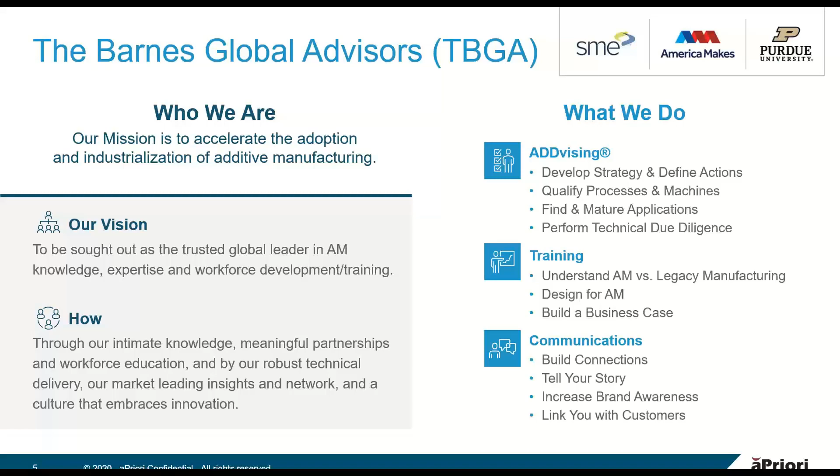Our mission is to accelerate the adoption and industrialization of additive manufacturing across the manufacturing supply chain. We do that by being agnostic, so we work with all the different additive technologies, which we'll describe in a bit, and we work across the supply chain, from powder producers to original equipment manufacturers of additive manufacturing and other machines, to engineering service providers, which we are as well, and to investors, inspection and post-processing, really across the size spectrum as well as the AM experience spectrum.

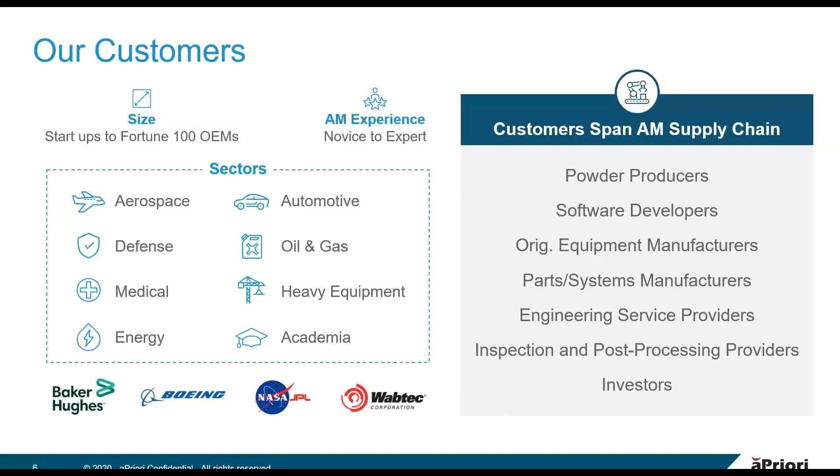Sometimes it's a 'hey, can I print this' question. Sometimes it's a 'hey, I've got this idea that my management won't support because I can't figure out how to get an additive business case to go.' And this happens across companies, from one-person size that just started in a garage to Fortune 100 OEMs, really across aerospace, defense, oil and gas, academia, medical, energy, and automotive industries.

So anyone on this call has probably had an article about additive dropped on their desk, or found something in the local business magazine, or seen something in the news about 3D printing, additive manufacturing technologies, right? There's been a lot of hype. Back in 2013 or so, when the light blue curve on this graph was generated, I would have told you that hype was way overblown, that additive manufacturing as an industry wouldn't have grown that fast.

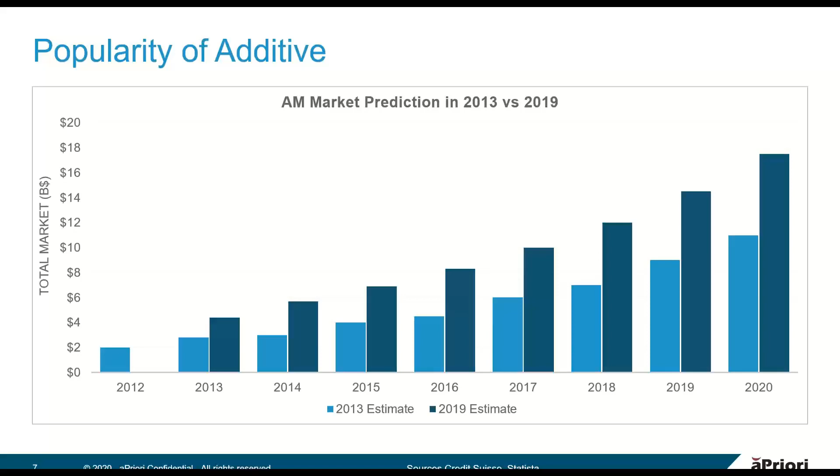But then look at the dark blue, right? That's an estimate 6 years later of the total additive manufacturing market, and it's significantly larger than the light blue prediction from 2013. Right now we're going through some unprecedented changes, so 2020 might not be as rosy growth, but we expect that growth in this industry will continue, after maybe a 2020 pause, maybe a 2021 pause. We're super excited, not because the industry is growing, but because the applications are so varied and so broad.

So what can AM do? It can make things from very small to quite large. Here we've just grabbed a few examples. The one on the very left is a miniature Eiffel Tower built by a polymerization process of polymers, and the total height of that exact scale replica of the Eiffel Tower is 1 millimeter. Can you imagine this large iconic structure being reduced to the size of 1 millimeter?

The second one there is a Red Dot Award winner from 2017, which is an innovation award in the additive space. Maria Sanchez designed and is modeling a dress printed on a typical 3D printer that you might find in your local library.

The third example there is a more industrial example: topology optimized internal structure of an aircraft service door. By using next generation computing technology and traditional casting, this is a part that can be much lighter and look very different than conventional parts. In this case, it's something like 30% lighter at equivalent strength of a conventionally manufactured door, and it takes much less time to manufacture.

And the quite large example there is a printer company called Icon and a community development company called Mobile Loaves and Fishes, which is using 3D printers to print concrete homes for the homeless in Austin, Texas, and in some communities in South America. So this is the breadth of what AM can do.

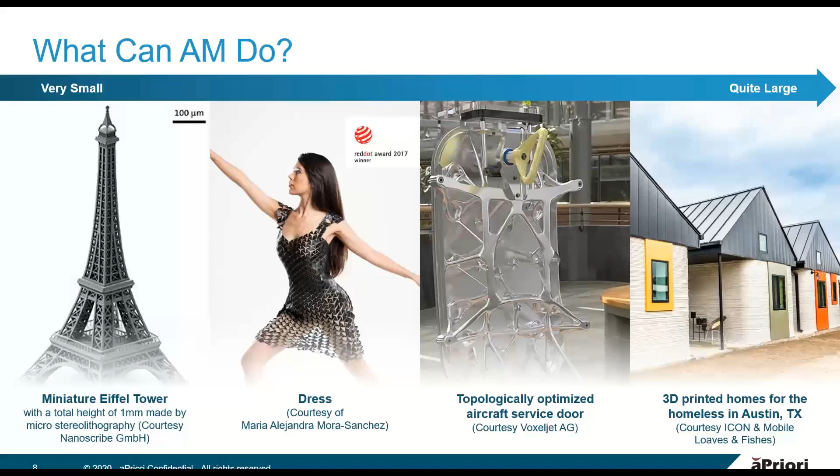And we love this breadth. And the reason why there's such a breadth is because additive manufacturing is really not just a technology, but it's a suite of tools that build parts layer by layer, usually starting from a platform. And here are the 7 recognized categories defined by ASTM committee F42. We'll go through them quickly from left to right.

So material extrusion, there on the far left, uses typically a filament or a pellet and is extruded through a hot nozzle, and makes parts layer by layer by moving in X and Y and then incrementing in Z. So it's typically a hot process because we have to make the polymer hot enough to become liquid, and it requires some energy. So those graphics - the red material graphic, the blue energy graphic, and then the density - are ways to think about these different technologies and describe their inputs and outputs.

So the second technology, binder jetting, is a powder bed technology that is interesting in that it basically takes a metal powder, spreads the metal powder, and then uses an inkjet head, much like the inkjet head you might have in a printer at home, to bind the powders together into an object. And then after printing, you do a couple other steps, including a sintering step, to get a solid metal object.

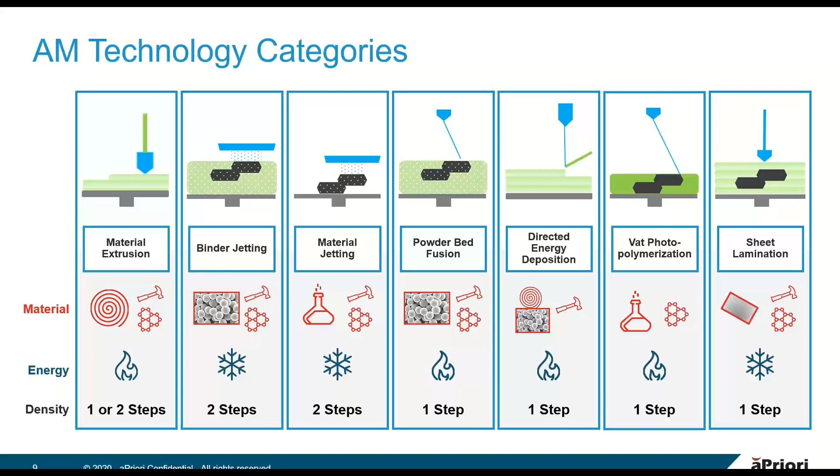And so this range of AM technologies is really what brings the ability to do such a wide range of interesting things in many different markets.

Okay, so TBGA here stands for the Barnes Global Advisors, our company. And we think about additive manufacturing applications through a maturity model. So the fancy thing that we saw, the aircraft service door, is not something you could go and design and produce as a company tomorrow if you don't have any experience. So we typically think about your experience - the skills and knowledge gained by using a manufacturing process - as the maturity model here on the blue side, and the product requirements - what's required to make a product - on the gray side.

So at low levels of maturity, like level 0, many companies have been using level 0 prototyping kind of technologies, made 3D printed objects for prototypes, for product development, and that's happened for many years. But the next step is production influence - using additive to either make short run tooling or shop aids.

Your workforce gets to learn about the differences and how you have to think differently to use additive manufacturing to solve problems. One example from a number of years ago: I bought a 3D printer for a manufacturing shop I was working in at the time.

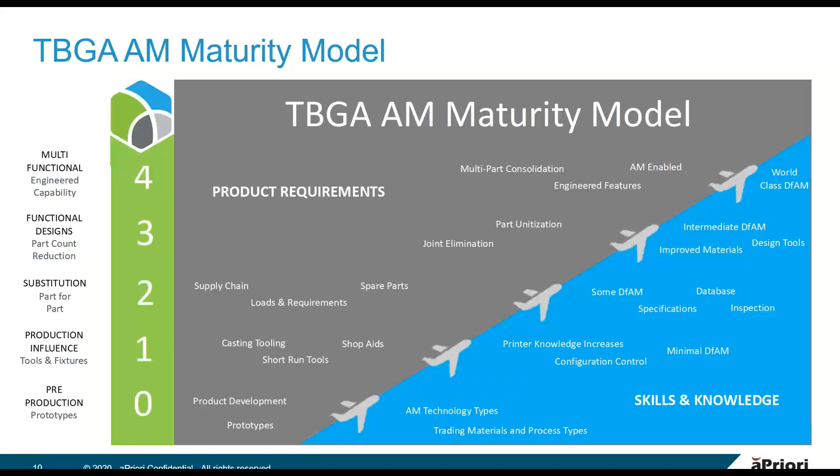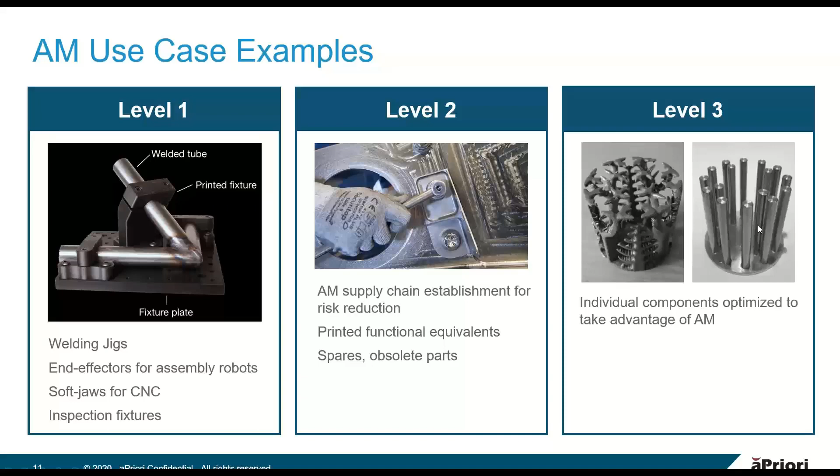So, simple example of level 3, but something that looks very different, and might be a hard sell at some point. So how do we encourage folks to identify candidates for additive manufacturing?

There's a bunch of different ways. I've chosen to highlight 4 here. Number 1 is complexity. If you have a very complicated multi-piece geometry that's hard to make, that requires multiple manufacturing steps in order to assemble, or has challenges in stress, reliability, or thermal performance because of the methods of assembly needed by conventional manufacturing, that's a good opportunity.

So think of something as simple as a heat exchanger that also needs to be a bracket. Instead of having a bracket and a heat exchanger, why can't that assembly do both?

The bright red there in durability is really thinking about where does a welded or a bolted joint fail in a product? Is there a way you can optimize your product and eliminate bolt joints, brazed joints, welded joints, or does the machine tool limit the geometry you're using? So durability is often a good thing, looking at part failures and assembly failures and why, and could you re-engineer that for better life using additive manufacturing, maybe putting 2 or 3 parts together as one.

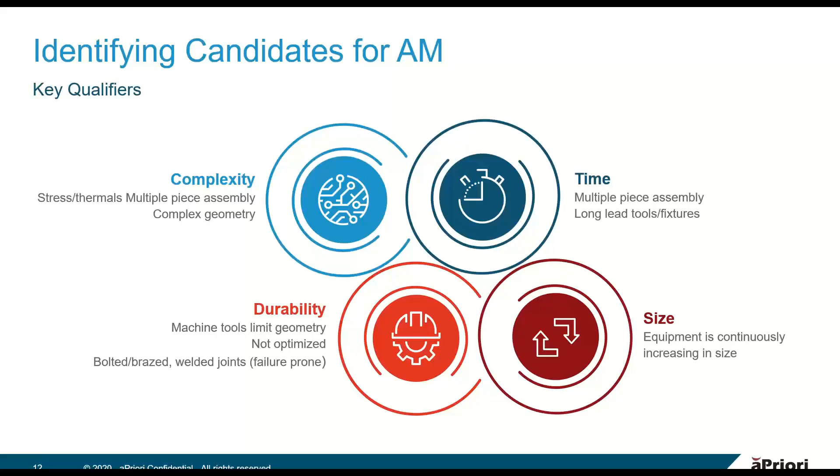If we look at the economics of additive manufacturing, with a trade study we did a number of years ago: think about the legacy method, illustrated in red, taking a block of material and carving it using subtractive manufacturing and machining into 3 brackets. We take relatively low cost material, although this is titanium so it's not that low cost. We spend a lot of time, effort, and money machining 25 pounds, or kilograms excuse me, of material away from the block in order to deliver a part to a customer at a cost of about $3,500.

If we look on the right side, illustrated in gray, instead building those 3 brackets up from a base plate, we end up using considerably more expensive material. In this case it's still titanium, but titanium powder is expensive. Printing at a relatively common rate, doing some machining - instead of lots of volume machining, we only do surface machining to get to the same net shape - for a total part cost of about $1,500, which seems a lot more attractive to me. Total cost savings on those 3 brackets is almost $2,000, which is nothing to sneeze at for titanium.

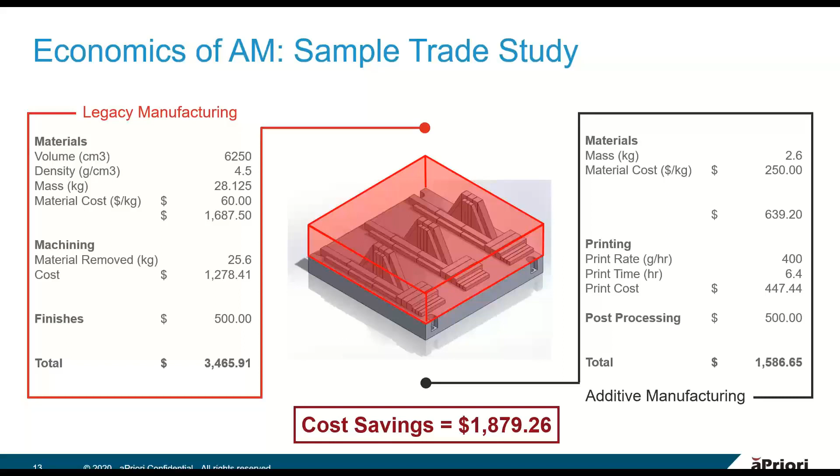If we look at overall additive manufacturing markets, aerospace sort of led the way, and medical. Aerospace has been flying military jets with additive printed parts for more than 20 years. Commercial jets have been flying plastic 3D printed parts for a number of years, and really getting great innovation in printed metal parts because of the demands of lightweight, strong, durable, but high complexity that aerospace brings to each individual part.

On the medical side, knee and hip implants led the way, followed by spinal implants, and dental reconstruction has been used for a number of years. On the knee and hip side, the first commercially implanted knee and hip implants both surpassed 10 years in their respective patients last year.

Luxury goods has been an interesting adventure in that being able to customize a ring or a necklace using additive is quite effective. Lots of luxury goods, you may not even know you've bought something that was 3D printed, because the luxury good company wouldn't let you know that. But it may have been instead of a more traditional cast process, which is how most jewelry is made.

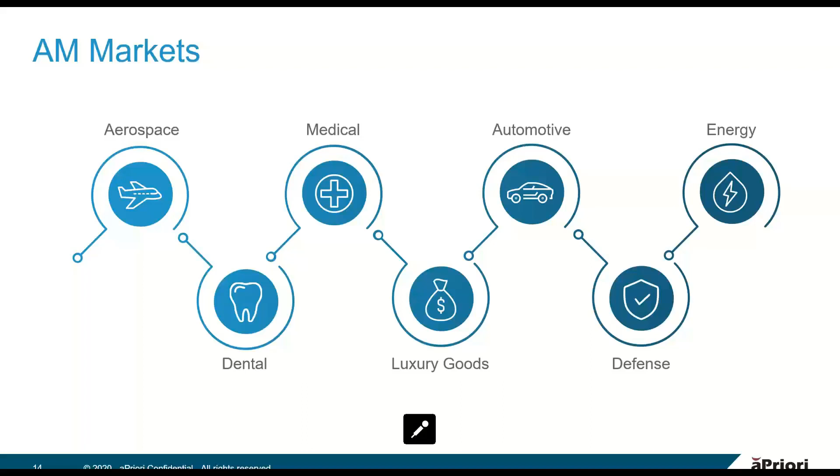Great, thanks, Kirk. Now, I'm really excited to talk to everybody today about the case study that Kirk and I had worked on. But first off, let me introduce you a little bit to what we do at aPriori.

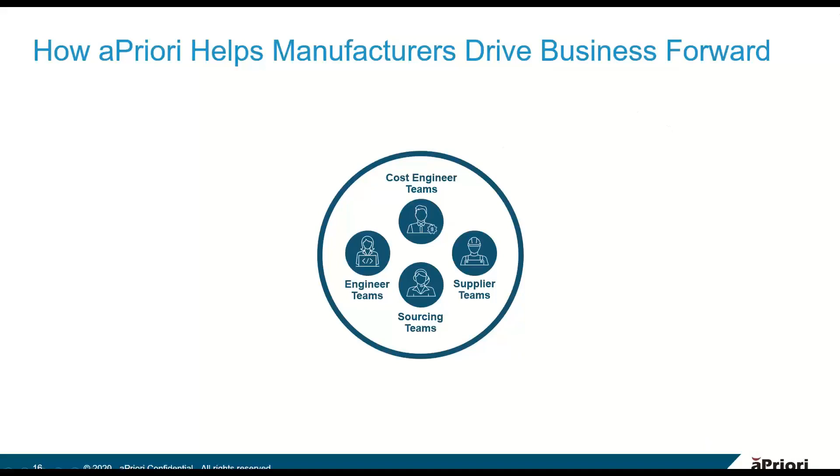At aPriori, we help a number of roles throughout the manufacturing organization, and we do that in a number of different ways. First off, it's to help make decisions faster by estimating cycle times and costs based off of your digital twins and CAD files within our factory models.

We also help you to work faster by automating the feedback of manufacturing insights and providing that to engineers, as well as automating some processes within sourcing.

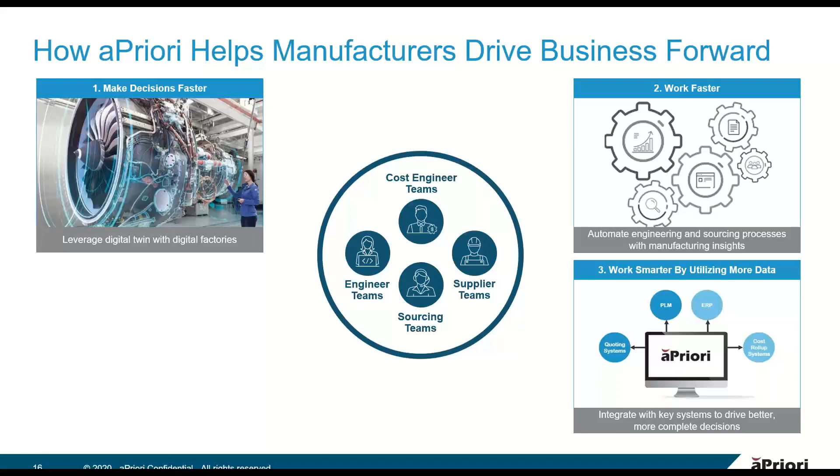We also help you to work smarter by using the data that you already have within your systems to drive our models, as well as putting our own outputs where you need them, maybe in your PLM system, ERP, or other systems. And with our new cloud capability, we allow this to happen anywhere, which is even more critical now to help support collaboration across your organization.

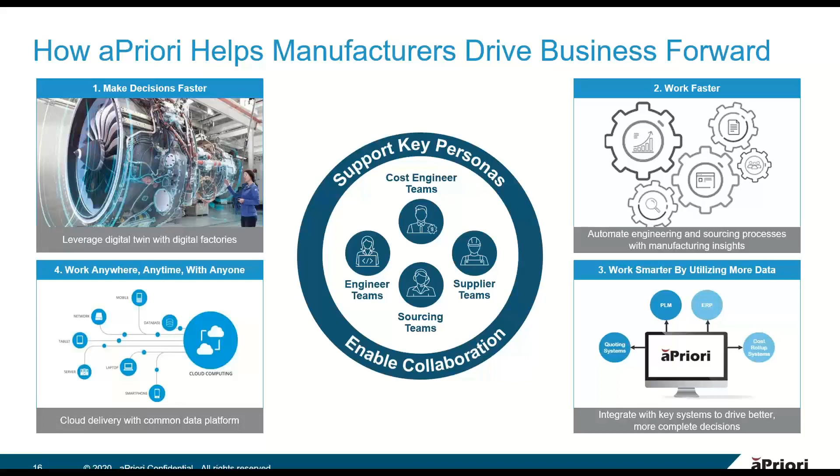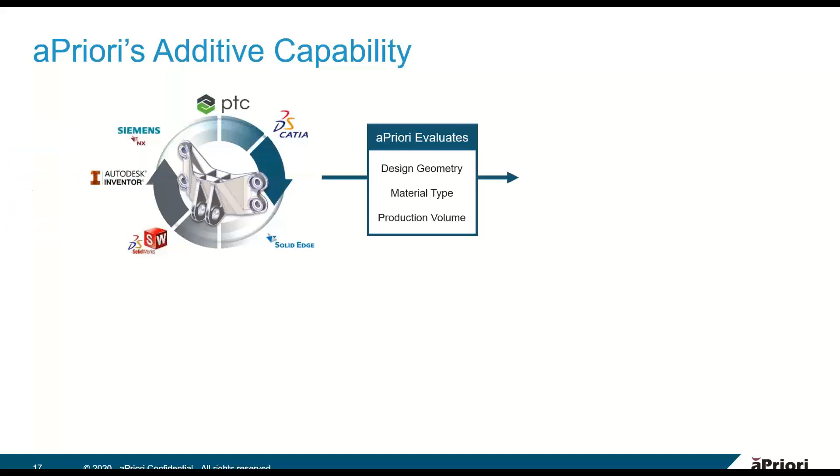So let's take a closer look at how we actually support these efforts within our product. With our software, we can read most major 3D CAD systems and analyze them. As we do the analysis, we evaluate the design geometry, the material type, and the production volume in order to estimate a cycle time and cost.

Within the space of additive manufacturing, we support a number of different processes that Kirk had mentioned earlier: SLA, polymer and metal powder bed fusion, and material jetting.

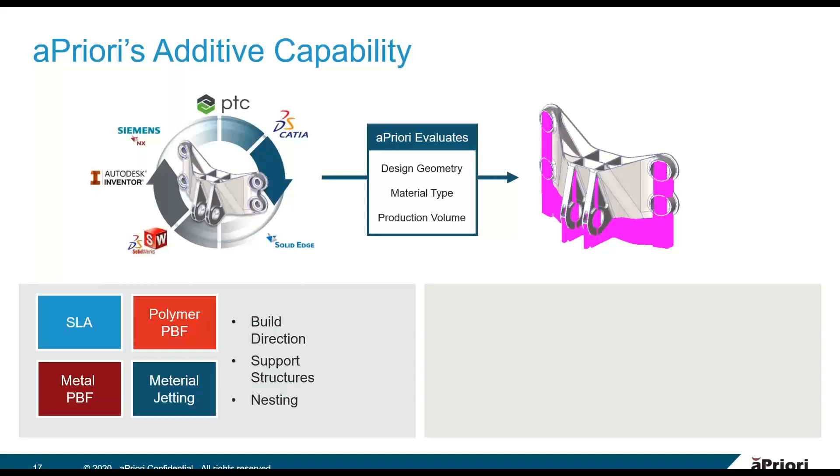As we do these types of evaluations, we can see an example in the upper right-hand corner of additive manufacturing. We determine a build direction, we determine what support structures may be needed based off of the type of process that's selected, and we also nest the part onto the build plate.

By doing so, we end up capturing that printing time, but we also figure out what secondary operations are required based off of the printing process that we're using and the requirements of the part. This can include things like break off of those support structures, secondary machining of surfaces, cleaning to remove dust and other materials that accumulate during the printing process, as well as secondary heat treatment and sintering.

Again, this is driven off of the support structures that we're calculating, as well as the tolerance information that we're pulling from the part itself.

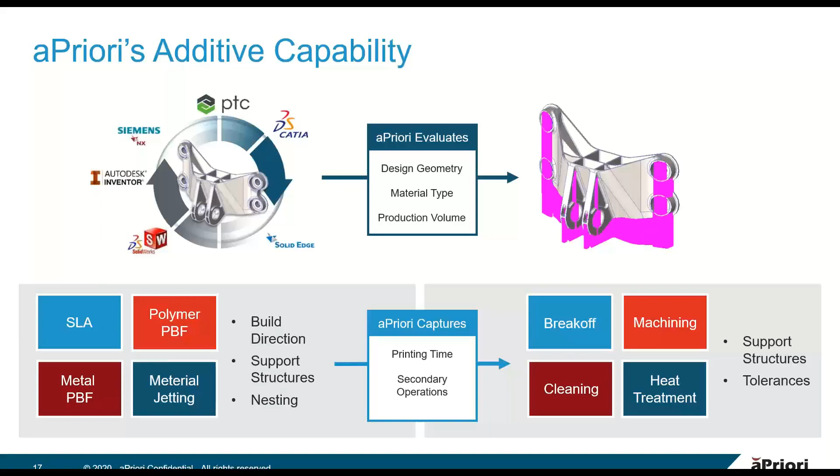Before we move on and start taking a closer look at the case study, it's time for our second poll, where we're going to focus on understanding how you're evaluating if additive manufacturing is currently appropriate for your parts. It looks like we see a lot of people who are using quotes in consultation with suppliers, some with internal expertise, and some use of previous data, and then we have a reasonable number who are also doing no evaluations currently. So hopefully by what we show with our case study, you can gain some understanding about how, with aPriori, we can support making these types of assessments and trade-offs.

Here we have our case study, which is a part from the aviation industry, which is a valve actuator housing. And this is a part that Kirk and his team use within some of their training. So Kirk, would you like to tell us a little bit about it?

Sure. So this is a part that I was asked to do a level 2 part-for-part replacement on when working with a large company in the aircraft engines business. Traditionally, this part is made with die casting and is made with a high permeability material that's like 50% iron and 50% nickel. As a quick case study a number of years ago, we saw that we could redesign it just a little bit and use laser powder bed fusion to print the part out of stainless steel, which had the magnetic properties required. And that took us about a week or two in order to do the evaluation and say, yes, we could print this part and we could do a low volume run of maybe 100 parts of it.

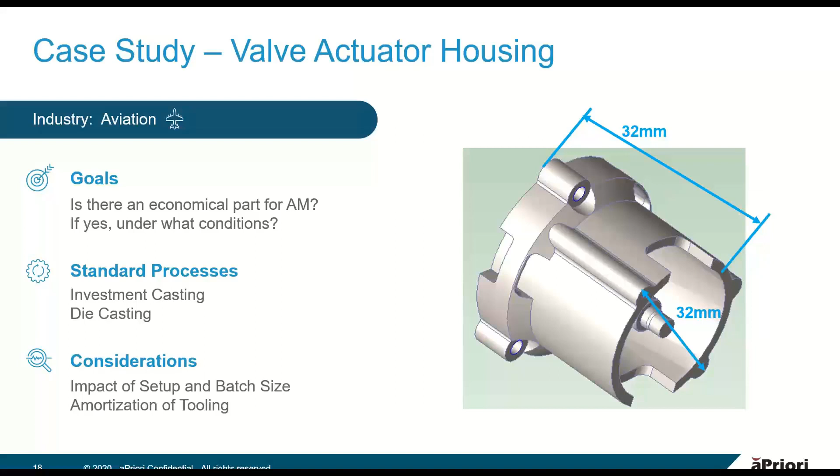Within aPriori, we make investigations really easy. So when I ran through this investigation myself, my first step was to load the CAD file into our system. And then I was able to very quickly create the 3 different options, one for investment casting, one for die casting, and then one for additive manufacturing, where I used metal powder bed fusion.

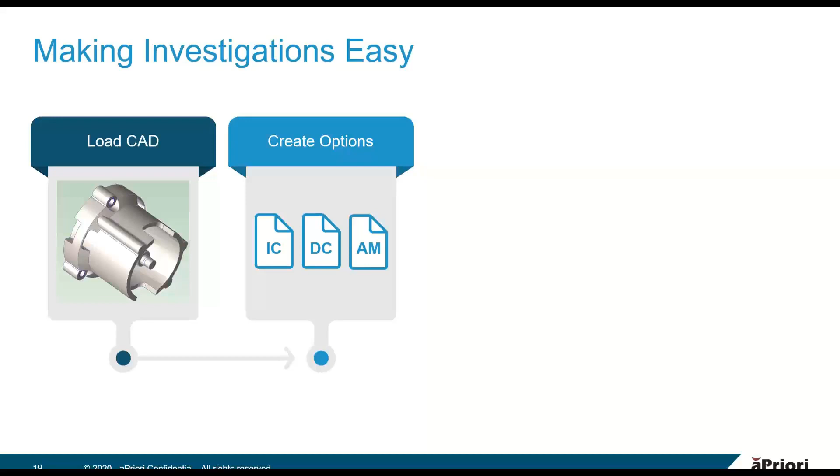Based off of those first 3 options, I could use one of our newer features called matrix costing to very quickly create a selection of different scenarios with various annual volumes and various batch sizes to start to understand where breakpoints might be. After I completed those, I was able to generate the reports.

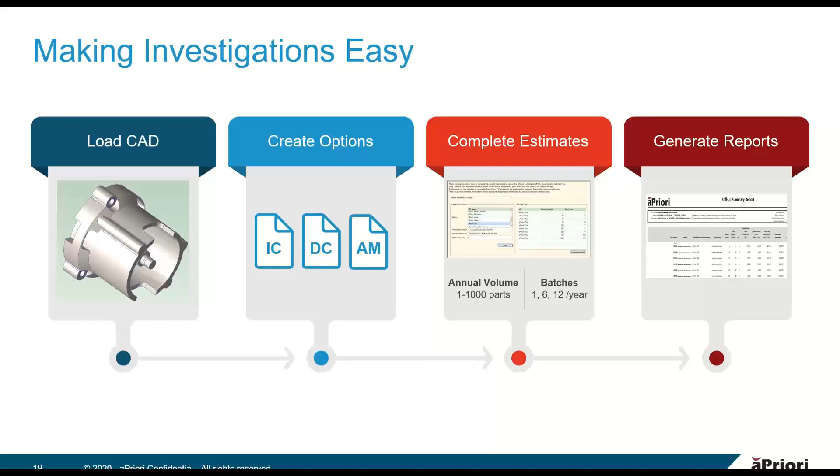Now, as Kirk mentioned earlier, and I'm sure since many of you work with your suppliers to do these evaluations currently, you know that this can take days or weeks in order to get even these first options back. But doing a large selection of different values based off of annual volumes and batch sizes can take even more time. I was able to do this analysis in less than 2 hours in order to get all of this information out. We can see definitely a time advantage there.

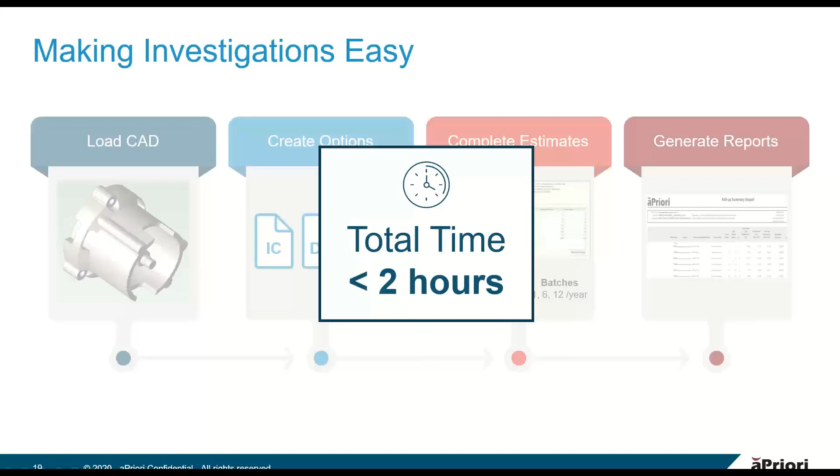Now let's take a closer look at how the costs break down and what we're able to see within the context of aPriori. First off, what we want to focus on is what's known as fully burdened cost. And fully burdened cost includes not only the more traditional things we think of when it comes to a part cost, such as the material cost and processing cost related to labor and the machine time, but we also include the capital costs.

So these are the one-time costs related to maybe the hard tooling that we see for investment casting, so around $10,000, die casting around $20,000, and then with additive manufacturing, we have one-time costs related to programming and fixturing that come in at about $600. Now we take and split that over the total number of parts that we're making in our run. So in this case, it's 1,000 parts over 5 years, so 5,000 parts. And that gives us an amortized value that we assess to each individual part.

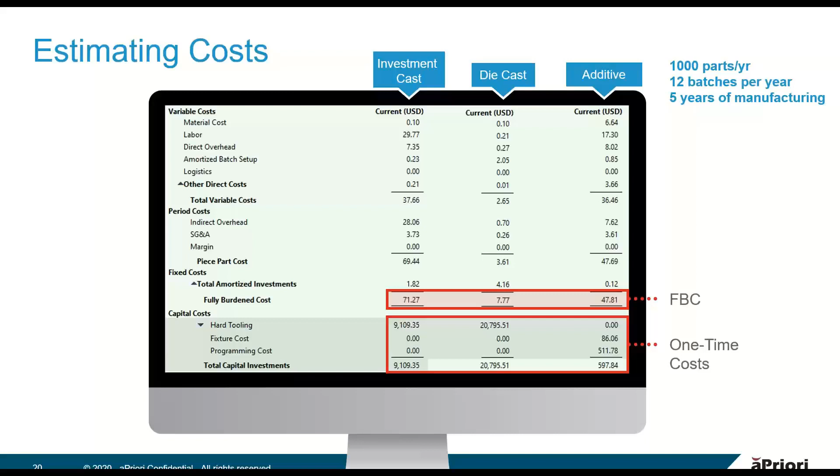In addition, another thing that's driven based off of how we select our batch size is an amortized batch setup. So when we select a batch size, we split the amount of time it takes to set the machine up and the cost related to that across the parts in the batch. And so we can see that here. What we notice is that die casting in this type of scenario ends up being the least cost, because though the investments are low for both investment casting and additive, as well as the batch setup, some of the other costs are much higher, such as the actual cycle time, which will drive the labor and overhead costs much higher for the other processes.

But it's important to understand this is just a snapshot. This gives us one example, in this case of 1,000 parts with 12 batches per year. But what we want to understand is where those breakpoints are, so we can make the best assessment possible and the best choice for our individual part.

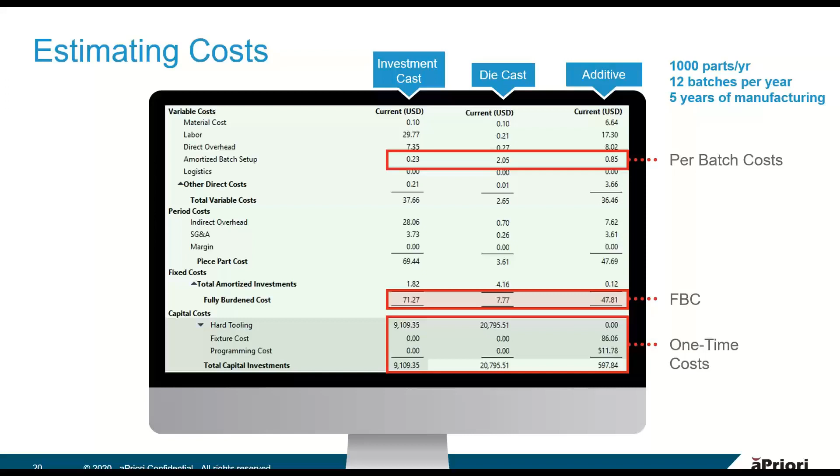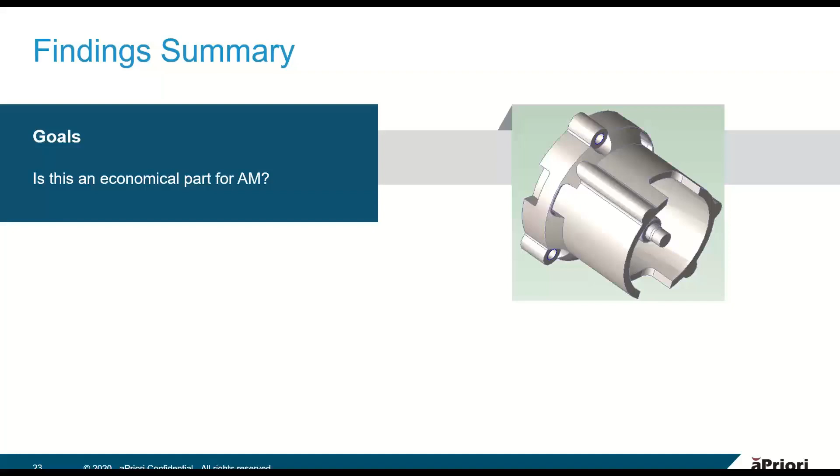So where does this leave us? Now, our goal was to see, is this an economical part for additive manufacturing? And yes, it is, but we do have some things to take into consideration, and that is the number of batches per year, as well as the annual volume.

And so as we're working our way through the product development process and we're determining, is this part a good fit for additive? The first thing we'll want to do is confirm how many parts do we anticipate making per year? How many years are we going to make this part? And then what's our production rate, the number of batches per year that we're going to require?

And then based off of that, we can run these iterations to start to see, is additive feasible from an economic perspective? And where are those breakpoints as to when it is? Because as Kirk mentioned earlier, the original case was to see, does this part make sense for a limited volume run within additive? And in this case, it may.

And so in that case, what we may want to do is exactly what Kirk's team did, is to redesign this part so it's even a better fit for additive within the terms of that specific run. And from there, you would continue your design process.

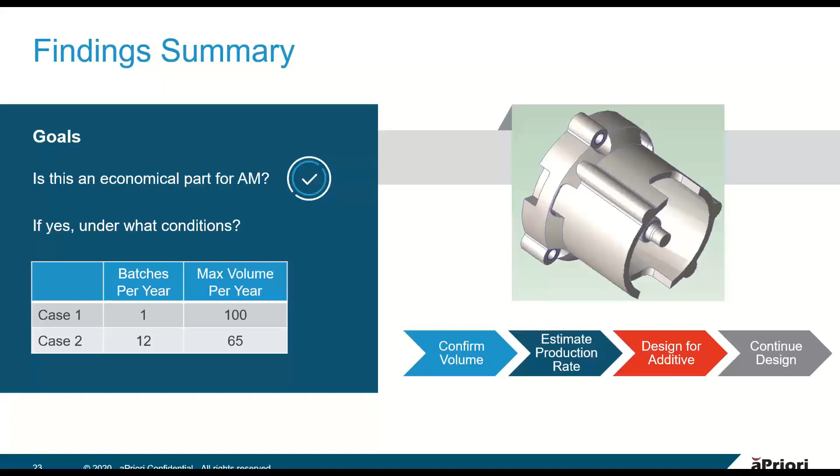So I'm going to hand it back over to Kirk for a second so he can give a little bit more context around how this type of investigation can help drive innovation further within additive manufacturing.

Thanks, Amanda. So, looking at the case study you just saw, it's pretty obvious that a tool like aPriori would be a great way to quickly identify lots of opportunities, even without doing some redesign for additive, right? And also potentially evaluating what happens if I redesign for additive, even if it's just a conceptual design, throwing it back through a quick analysis that only takes a few minutes is much, much more cost effective than trying it, printing it, evaluating the results, and going through the actual physical analysis cycle.

The second area where we really think these kind of tools can help is to evaluate use cases, right? So if you don't really know what the business case is, but you think it might work, you do the virtual simulation using the tool, and you can quickly say, oh, my fixture, if I do it this way, is going to cost half and be twice as fast as if I did it traditionally with Joe's tool shop down the street, right? You can balance lead time.

So oftentimes in the design and production cycle, maybe you could take a little bit more cost and use additive for the first 100, 200, 300 parts, and then switch over to a more cost-effective high volume production situation, right? You can also evaluate the idea of part consolidation, right?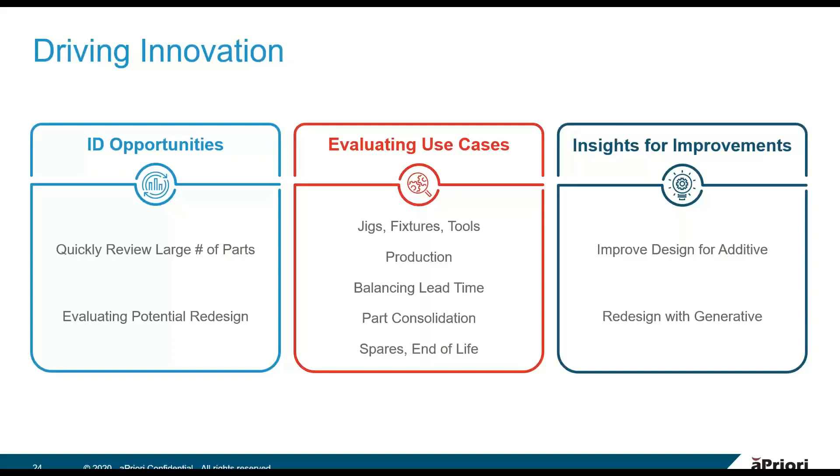The other thing is really highlighting insights for improvements. So again, using a tool like aPriori to take your preliminary design for additive and give it a cost. So hey, this moves the needle so much, I need to go back and redesign. Where's the limit? Where's the practical lowest cost point for production by the chosen method? And also, to quickly evaluate something that's been redesigned with a generative or topology-optimized tool, you get output from that tool and feed it into a tool like aPriori to assign a cost for something that looks otherworldly, that even the best manufacturing engineer in your company probably couldn't assign a reasonable cost to, because it's just so different.